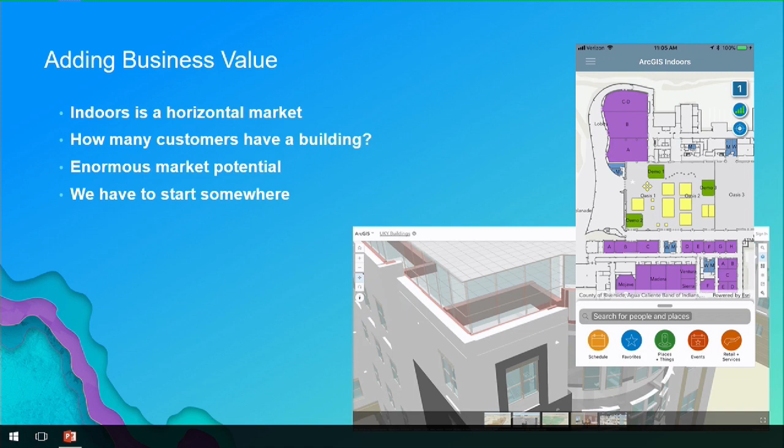Next slide. So, narrow focus, right? Just kidding.

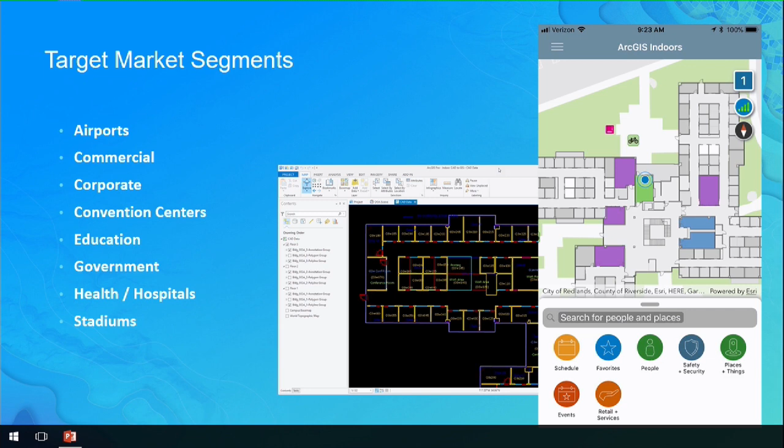If I had to rank order the industries that seem hotter than others, just by the way we're being approached by our customers, new and old, I'd say corporate and commercial, followed by national government, then state and local, maybe higher ed equivalent to that. I'd include airports and convention centers in the state-local mix, and then hospitals behind that. This is just a smattering, not a complete listing.

Next slide. So what is it? The part we can show off the most today is our iOS application effort, our Indoors app. It'll be available in iOS and Android. There's also the web viewer, which is a good way to describe it - a reincarnation of our previous 2D and 3D Indoors viewer technology, but totally re-engineered and refactored with new capabilities.

Off the top of my head, the totally new things include categorical search, the ability to edit, and the ability to conduct point of interest management activities directly in that interface. So now we've matriculated, we've graduated - we are one of the core product teams, so we can't blame it on anybody else anymore.

Part of it is maintaining relationships with other teams, including distributors. We're working closely with the operations dashboard team to include key requirements for visualizing indoor maps in operations dashboard - can I pass a configuration to ops dashboard of the very thing I'm looking at now and have it assemble and make sense? We're also working with Esri UK and their simple web editing tool suite.

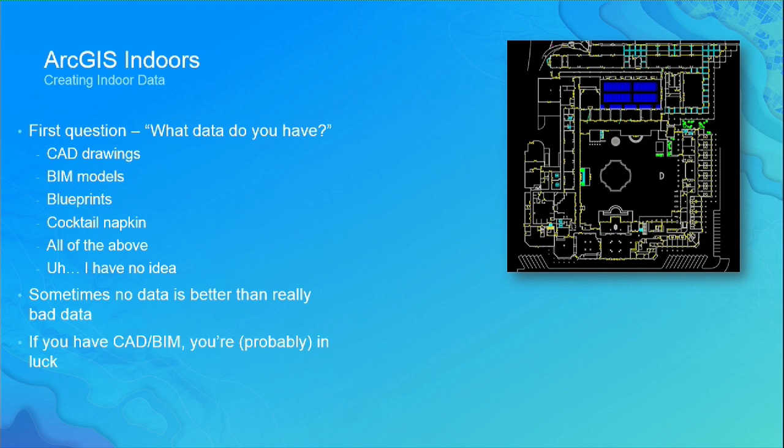All right, so I'm going to take us through the process of creating an indoor map. It's pretty key if you want to run one of these apps to have the actual map data, points of interest, et cetera. So first question is, what data do you have? You may have CAD drawings, BIM, blueprints, or maybe somebody drew a map on a cocktail napkin, and that's your source data. Hopefully not, but we can work with any one of these, and it's different levels of effort to get it into the system. But once you do, there's a lot of things you can do with it.

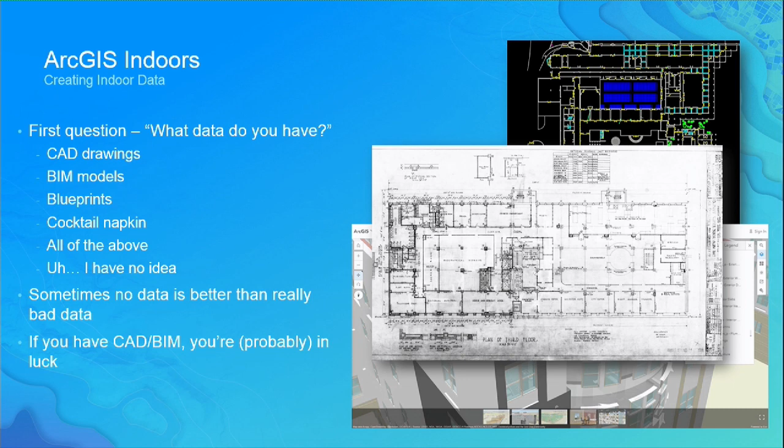Sometimes no data is almost better than bad data. We did a project with Los Angeles County, and they had drawings that were probably 50 years old, and they wanted to create a 3D indoor map of one of the large buildings in LA. So it was my job to create something from almost nothing. I look back on that and think, maybe I should have just gone clean slate and just drawn everything by hand. But if you have CAD or BIM, you're probably in luck, especially if that data is structured well.

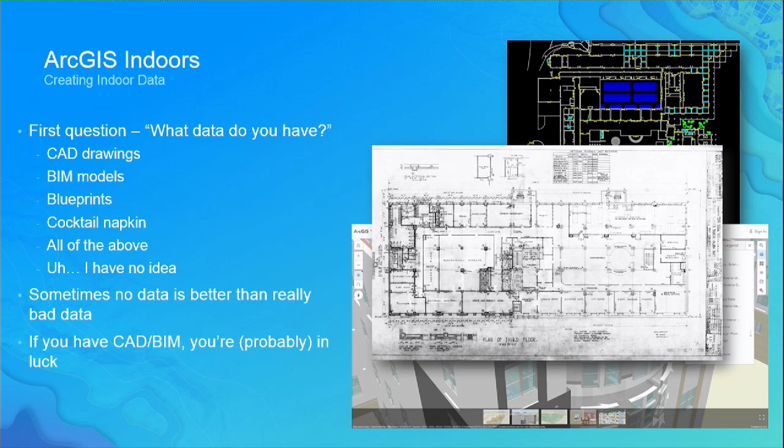So what we're dumping all this content into is the ArcGIS Indoors information model. It's a new schema for indoor mapping, and all these layers are managed and authored in ArcGIS Pro. The foundational elements are buildings, building polygons, levels or floors, again polygons, units or spaces, detail lines which are your walls, doors, columns, et cetera, and POIs - this is really the key component of an indoor map.

What are you trying to find? Whether it's a person, could be an event schedule, could be a piece of equipment, basically anything under the sun can be a POI. It has a location, you want to find it. And then the transportation network - how do you find it? In the past, creating a transportation network for a building was a very manual process. You would digitize center lines down hallways, have feeders into doorways and into rooms.

That can take a long time, and it doesn't scale well. If you have hundreds of buildings, how do you make that an efficient process? So we've been working on making tools to ease the burden of creating those networks, and I'll show that in a second. Then there's the vector basemap - this is your contextual information. Where am I? What's nearby? This could be a vector basemap that you've made yourself, and you've published and packaged in with a mobile map package as an element of that map.

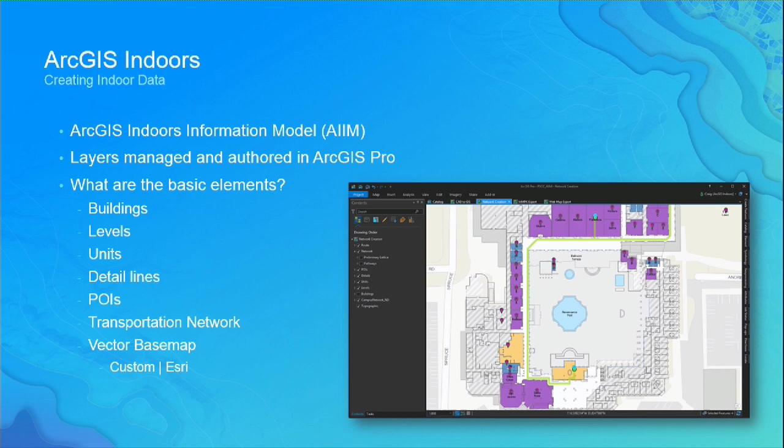Or it could be an Esri authored vector basemap. We're going to have tools coming out where you can actually scrape an AOI from our authored vector basemaps and use that in your own application, so that's coming down the line. But vector, especially at large scale, is certainly preferred because image tile basemaps get huge when you're at very large scales - the tiles get very large and numerous, and it just isn't mobile, it isn't usable.

So I'll go into sharing a little bit as I'm going through the Pro project. Let's go over to Pro now. The first step is bringing your data in, and I'm showing a CAD file here for the convention center, an area we're probably all familiar with after a couple days. What we've created is a Python toolbox to import those CAD files, those georeferenced CAD, and create a floor map that is 3D enabled. So it's applying Z information - basically your XY location as well as your floor heights and spacing - so that you can create that true 3D transportation network even if you're using a 2D app.

So what drives this CAD tool is an Excel spreadsheet. This is where you add in your layer names for your CAD, and they should be consistent between floors for this to work well. You're essentially mapping individual layers to the output GIS layer, and in addition to your layer names, you also have feature metadata for these individual drawings.

And this may be the building facility ID or site name, a description of its use. And finally, we have pathways to the actual CAD file on your system, along with some of the Z information—what's the ordinal vertical order, starting from 0 at the ground level going up.

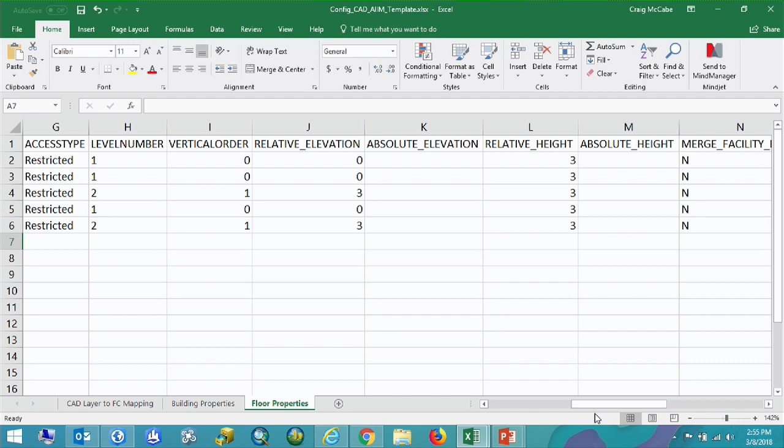And also we have our absolute and relative height information here as well, that's going to come in and add that Z to your output features. So we brought our CAD in.

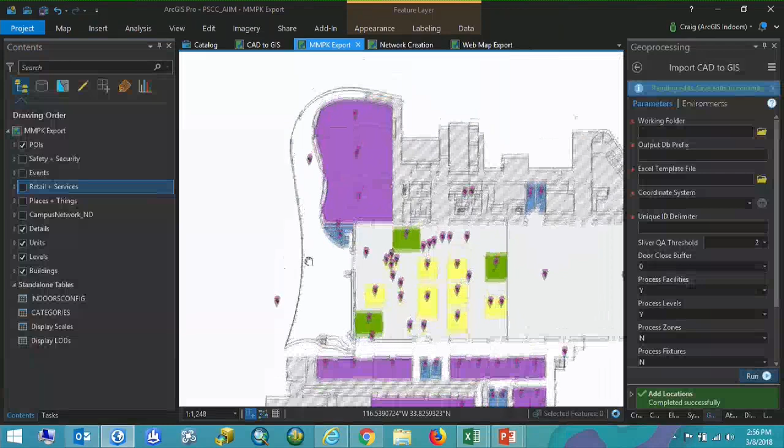Next thing we want to do is create our points of interest. And again, this is the real value in your map—these are the things you're looking for. And obviously, room centroids are your first point of interest that you're going to add to your map. These are your locations that you're going to find and route to.

And what we've done in this Pro project is we have, as you see at the top, different tabs for different parts of the data creation or publishing process—whether it's bringing in the CAD, exporting a mobile map package for use in a mobile app, creating web maps for use in web applications, 2D and 3D, or creating and editing your network.

So on the point of interest, we have different categories. The big containers here are safety and security, events, retail and services, places and things. We can also have a people layer, which we do in our Esri campus implementation of this.

And that's driven by a table. So when the application gets the mobile map package, we have all the icons for all of our POIs at different levels as attachments in this table. So if we look at people, we can see there's a set of attachments at different resolutions to show you basically that category that you can click on in your map or your app and locate those people.

And so this is extensible. You can add your own level 1, level 2 categories. A level 2 category would be an ATM, for example. And so it has its own icon associated with it, and it's a retail and services level 1 category.

So all of these, you can see, are internal in location. But if we wanted to, for example, have a feature service that has all of our places and things, we can change this to an external location and add a URL here in this field. And so that's helpful for basically connecting to external data sources in your map.

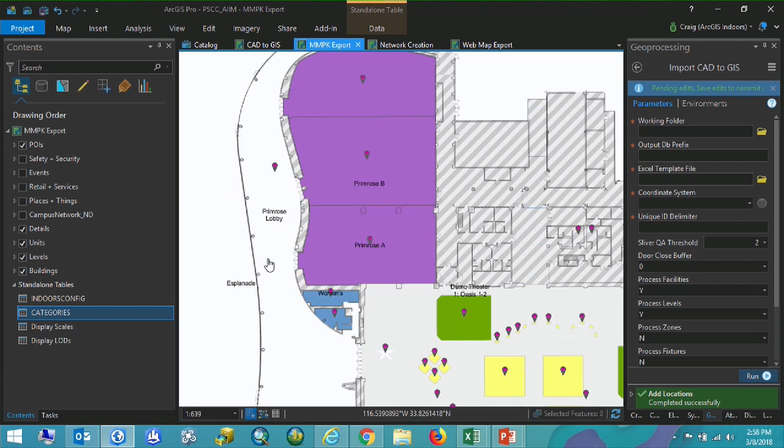Yeah, so obviously, Indoors is working its way to be a first-class citizen in the platform. Right now, we have some workarounds here and there, like these category tables that are just going to be part of the map package in the future. So yeah, short-term solutions to problems we've encountered.

So you have your map layers in here from the CAD to GIS tool. We've created POIs. Now we want to create our network. So we've created a set of tools here—let me see, catalog—and these we released at our tech preview last year at UC. It's a two-step process, essentially.

First, you create a Lattice network that covers every walkable space in your building. And that looks like this. Zoom in a bit.

So this is also called a tetrakis square, a square with an X through it, and you tile this around the building. You use the building rotation attribute to align the lattice to the building's alignment, and your lattice size is determined by the narrowest doorway.

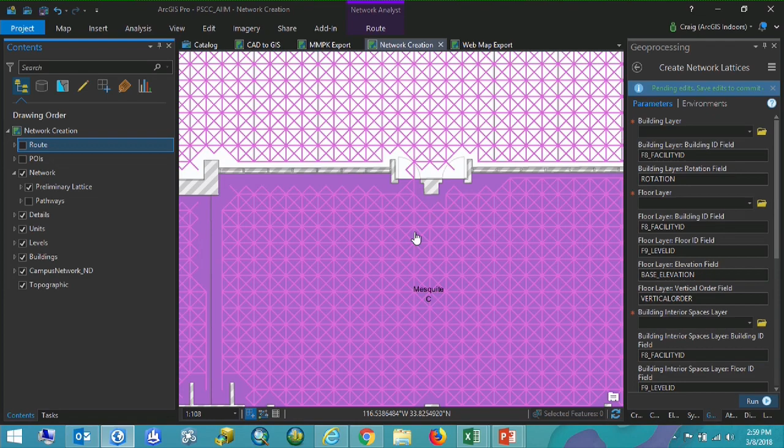You want to get at least one extension into every open door, and minimize the size of the lattice, or maximize it I guess, while minimizing the number of features. Once we have that preliminary lattice, we add in all of our POI locations created in our last step. These are things we want to get to along this lattice substrate we'll navigate along.

What we do next is thin the network lattices. So here we're taking in our pathways, this pink lattice, and our transitions, which are just vertical lines for elevators or helical lines for stairs to connect floors to each other, and also to limit how you navigate between floors. You can prefer to use a stair route, an elevator route, or an ADA compliant route - different network restrictions you can add.

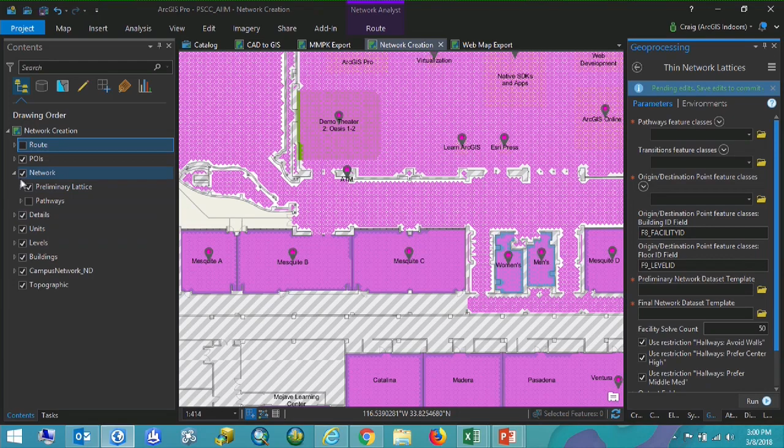Then we add our origin destination point features - these are our POIs. We have network templates you apply to the output network data set that you can then deploy. We'll turn on the output, which looks kind of like a circuit board, but what it's doing is traversing from every point, finding the nearest 50 points, then moving to the next point and finding the nearest 50 points, creating routes. Then it dissolves all these together into our final network data set that we deploy either on the web or mobile.

The real benefit of this is that you don't have to digitize the network, which is a real-time saver. I've done dozens of manual networks before, and the level of effort here is so much less - it was a revelation when we came up with these tools, even the rough first versions.

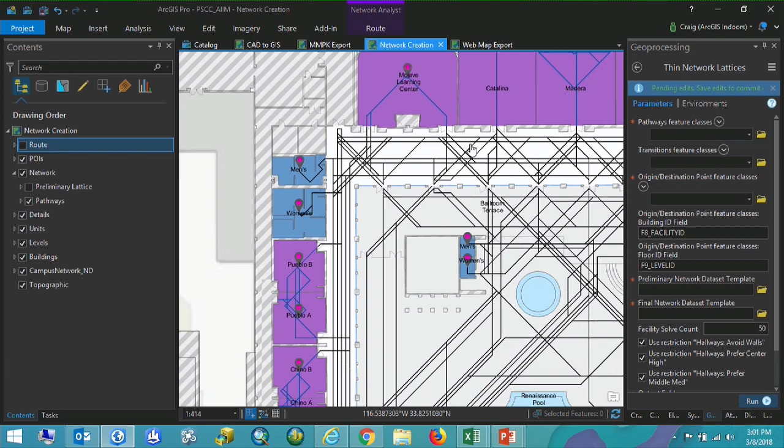It may look a little noisy when you look at these thin networks, but you don't actually see that when you're generating routes. What you see is a clear pathway that traverses these networks to get to your destination. So this is where I'll be going when we're done here, over to Rocks Lounge. And you can actually get directions as well.

Directions is an ongoing research project at Esri. There are complications with trying to direct yourself indoors - there's no cardinal direction sense, like where's north? Anybody point to north right now? What is a street sign indoors? There are barriers to easily navigating indoors, and we're trying to figure out solutions to those.

One solution is restricting it to transition-by-transition directions. I want to know when I'm leaving a building, when I'm entering a building, when I'm going upstairs or taking an elevator down. Other than that, it's on the map.

So beyond that, maybe I want to call out landmarks along that route. How do I curate those landmark points to make sense and not burden me with additional information I don't really need, like calling out every room I'm passing, for example.

We're working on figuring out what the level of detail is in a route to make it usable and interesting. Right now we can expand the events here, and this is a very sparse route - it's just telling us we're passing by Pasadena as we're leaving here.

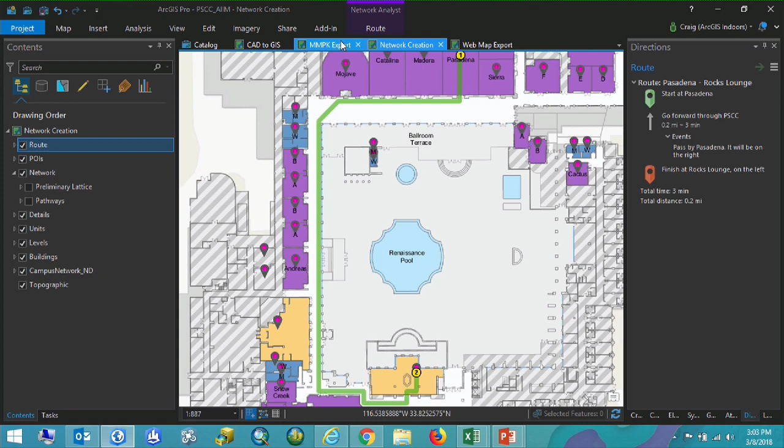Then we're going to export to our mobile map package, in this case for the mobile app you're using, or some of you are using this week in the beta program. That's just the Create Mobile Map Package GP tool. This creates a package that includes all of our vector information, our network, our POIs, and we push that up to our ArcGIS Online account, where the application requests or updates that mobile map package when a new one has been uploaded. We have some other version information that manages updates and makes sure the app is in sync with the map. So that's a quick tour through the content creation workflows and our Pro approach to that.

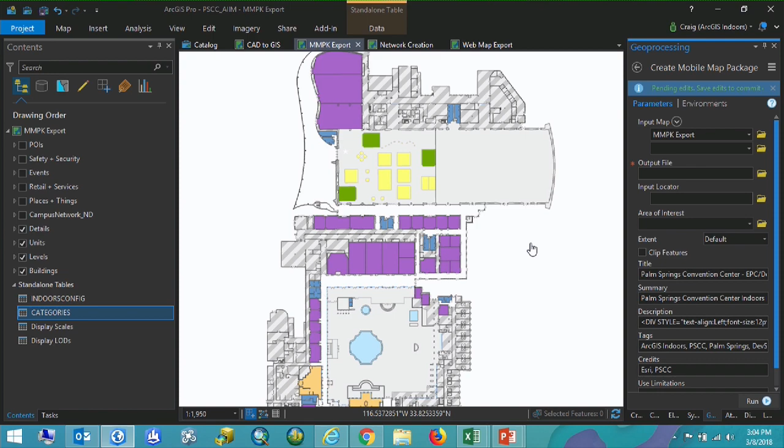We can also publish that information as map services or scene services to ArcGIS Online or Portal. And once those things are out there, this is not some specific indoor thing, we're just using the ArcGIS platform. In general, that's one of the things we strive to do on the Indoors team: if it's already in the platform, we make use of it. We try not to reinvent something that's already there. Obviously, if it doesn't work with floor awareness or something like that, we'll try to make it so. But once it's on ArcGIS Online or Portal, there's a lot of advantages. One is access control and content management. You can change what someone has access to by their login. You could create an anonymous version of the data or an authenticated version of the data.

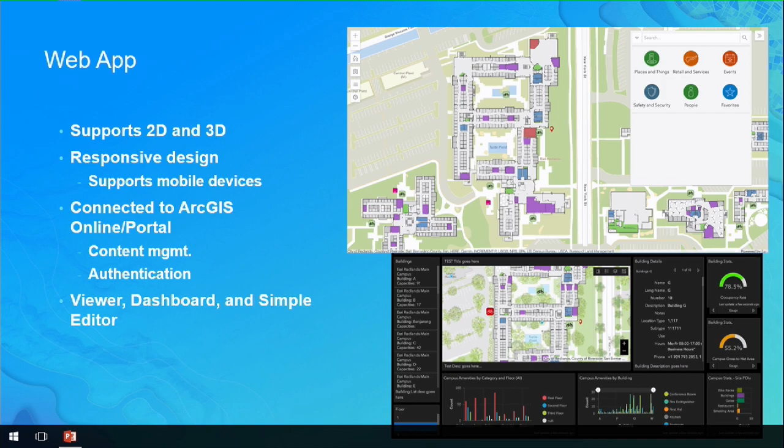So we've been working with the ops dashboard team to get our use cases into their planning. They've been a great team to work with, so there's going to be more coming with that, and the Suite Simple Editor that Pat mentioned as well. So that's the end of the slides.

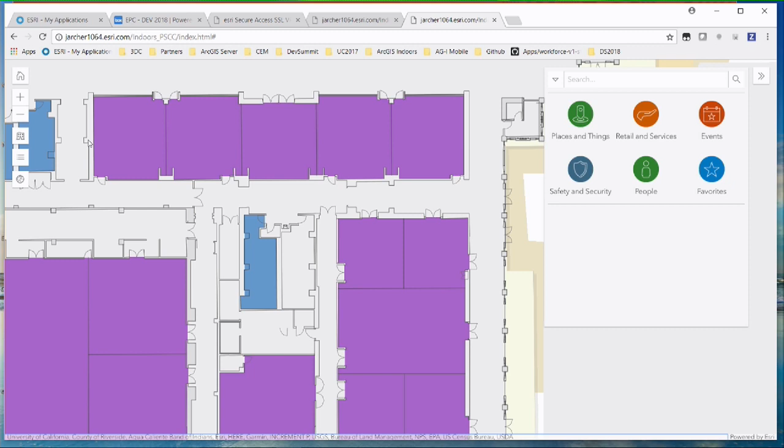I'm just going to quickly go through a couple of demonstrations. This is the current version of the web app, as of 48 hours ago. This is pulled straight from our GitHub repo. It uses the data that Craig put together for the convention center, and you can see a lot of the same look and feel. Now if I click on some of these things, I can identify them, and they come up in this little side panel.

I won't get too much into the development part of this, but one of the things we want to do is allow people to create these kinds of components in the application. I intentionally don't call them widgets, because that term has been taken by another JavaScript thing, but these are components you can build for the indoor application. This is just one of them, where you can identify things, and then you have these action buttons - you could route to, route from. We're also going to add the ability to share that or make it a favorite, similar to the experience you see on the mobile app, which we'll also look at in a sec.

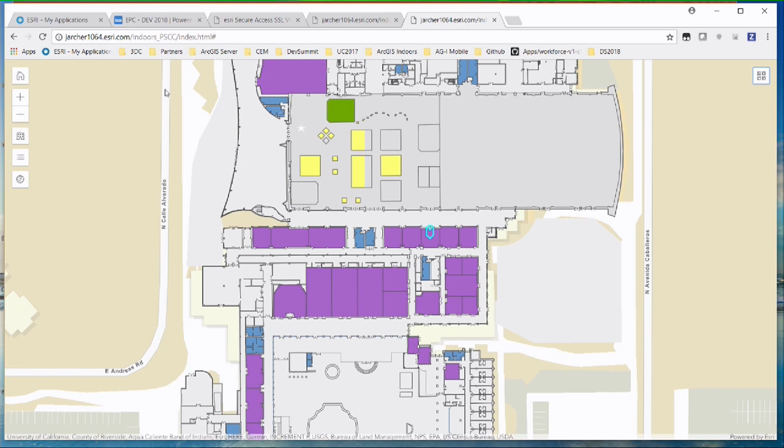Now, really quickly, I want to show off a couple more things, I'm going to switch over. This convention center isn't all that interesting from an indoor perspective because it's only one story, so I'm going to switch over to Esri. Let me refresh this, get some data in here.

Now, another problem we've tackled with this release is one of those indoor problems. I'm having a demo problem right now - I guess my data services... there it goes, come on. All right, now I got a map, but I got no tools. Maybe this will do it. There we go. All right, now we're cooking.

So the other thing we've worked really hard on is this idea of a compound floor picker. In the past you had one choice, you could show one floor across the campus - you pick 1, 2, or 3, that's what you get. But now we've made this compound. This is the result of a lot of work with the JavaScript API team, enhancement requests, meetings, and furrowing of brows. We came up with this ability to do multiple individual floors of individual buildings.

This may not seem like a big deal, but trust me, it is. Being able to do individual floors and individual buildings is necessary to support a lot of workflows. Now we've got it.

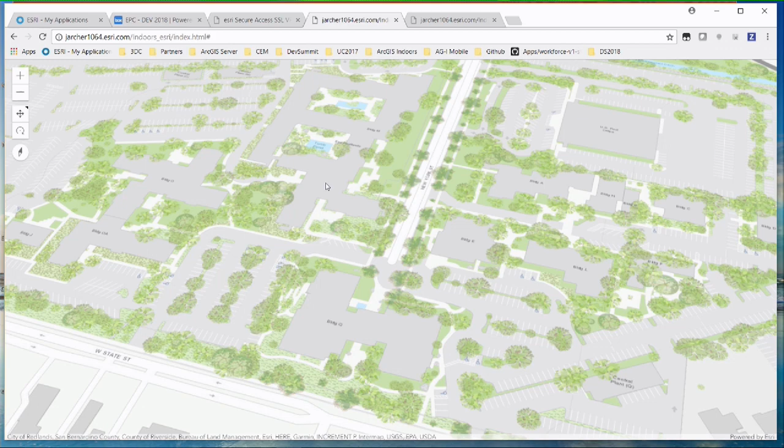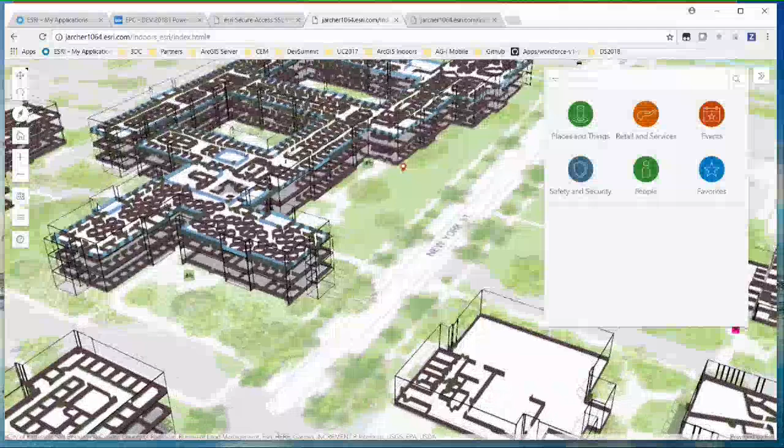Another new functionality we've included is the ability to switch from 2D to 3D. In the past, the application was only 3D. Let me see if I can hold a microphone and click... hey, look at that. So we have 3D support, but also 2D support, in the same application, in the same code base. There was much rejoicing when this actually started working, so we're very proud of this. And that's about it for the web application.

I'm going to switch now, over to my phone.

While he's getting that up, one other thing to mention on the compound floor picker is that you can use it in combination with categorical search to filter. Not only will you be able to filter your returns by what's in your extent, but you'll also have the choice to filter by what you've actually selected in that selector. Those capabilities combined together are pretty powerful.

There we go, that's better. So here we see my blue dot. I'm not having a spasm — I'm actually trying to localize the blue dot. It likes when you move around, basically. We'll see what happens; I'm probably going to yank the video feed out.

Well, I'm close, right? So I'm in the secret hallway over there, walking down toward the restrooms apparently. So not the best blue dot location just now, but you can see this is the same data that Craig published as a mobile map package — the exact same dataset, only it's been published as a mobile map package.

You can see down here in this dialog all the different search options that I have. I can access the schedule that's on my phone — we can put it all on your map if you wanted to see your calendar for the day. In fact, I did this morning; I couldn't remember where I thought the session event was, and it's something like something/something/something. So what it's doing is really looking at the location information in your calendar — this event, this room — and it's just throwing that through our search, and if there's a match, it's going to show it on the map for you.

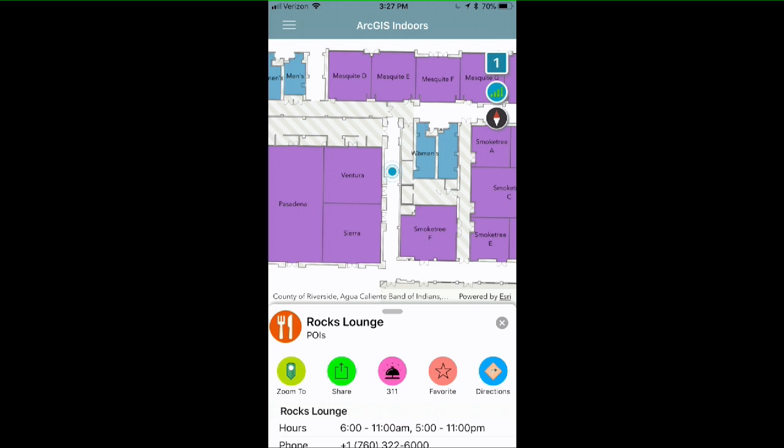Right, and I guess that's all I had. Yeah, I don't think we missed anything.

So, are there any questions?

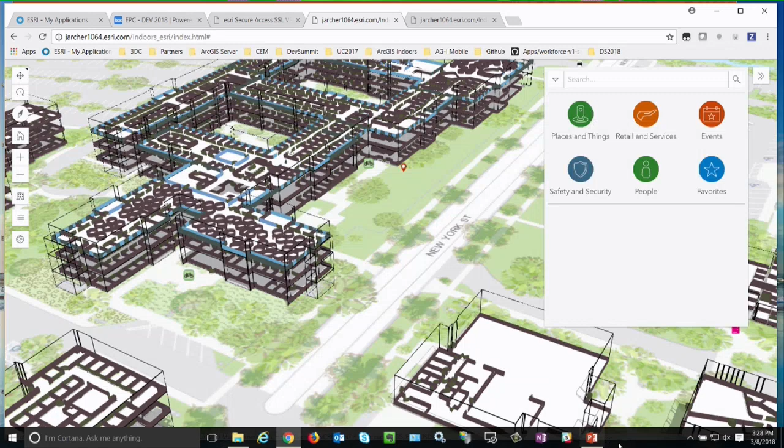Yes, I don't know if this is possible or not, but say if I was a maintenance worker and I wanted to see wires and conduit or pipes that were above or below me, could I turn on, if I was on level 2, could I turn on level 3's utilities and then see what it's like if I go through the ceiling or the floor?

No, that would be a map authoring issue, right? So, good question. We do give the ability to see multiple things in the web viewer, but just because of the screen limitation that you have right now, I only can see so much. What you may want to do in that situation, it's a map authoring issue. So you may have like a reflected ceiling thing that you want to see. So you might introduce something that would otherwise show in another level and have it show up in this current level as a separate layer. So that would be one way to handle something like that.

Other questions? Yeah, it's kind of a conceptual thing. So, currently office buildings have to submit floor plans to their city government for public safety purposes. Do you see this ever becoming like the replacement for that? So these building layouts could be used for... Yeah, I mean, we've thought about that, talked a lot about that with our product manager, Nitin Bajaj.